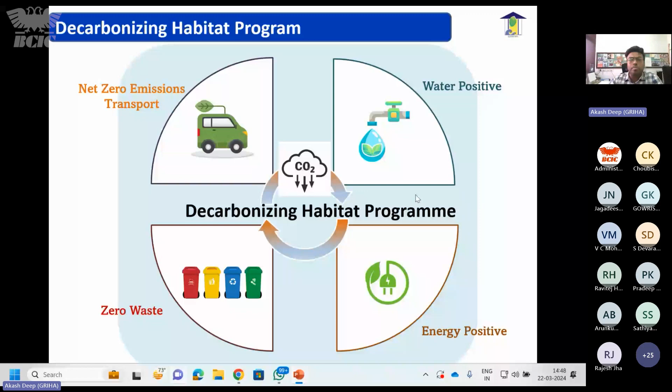This is one of the other certifications at the base level, the bottom of the pyramid, our affordable segment. We do this with banks, and again in this, energy, water, and carbon are the three major areas we look at. On this basis, we help make the bottom of the pyramid much more efficient. It's a both-ways approach—bottoms up and top down.

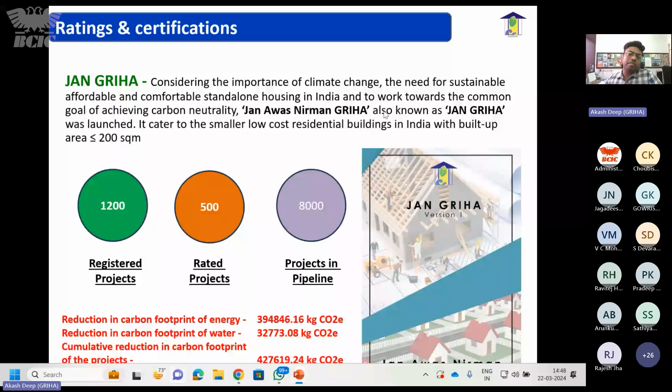Coming to water now: water everywhere and no water to drink. That has been a past saying which is now coming more and more true in recent times, and no better place to illustrate this than Bangalore, because Bangalore has been known as the lake city of our country, and somehow now it is moving towards being the dry city of our country. One of the reasons is that globally, as we all know, we have lots of water that we see—the ocean, the water bodies, the glaciers, lakes, cities across the globe—but only 1% is actually potable and usable, and that's where the challenge lies.

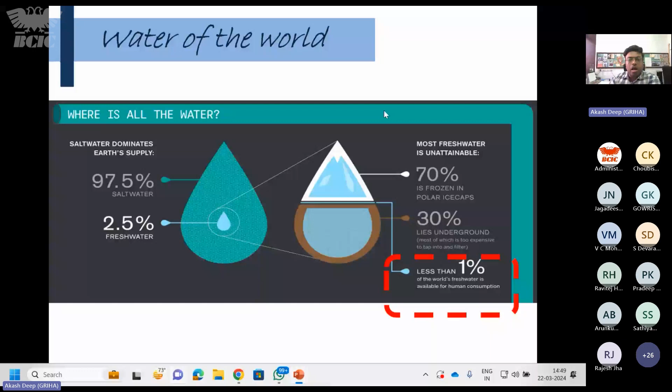The consumption of water has increased drastically because of increase in population, activities, and industrialization, but the production of water is not there. What's happened is that the 1% that was usable has also been contaminated and pushed towards not being usable. This is the reality, and it's become worse now. In 2007, as per the WHO, for every 6 persons, 1 person was not getting water; now for every 6 persons, 3 are not getting potable or clean drinking water.

In India, it's very, very straightforward—we like everything in its harsh realities, so nothing is balanced in general. So we have too little in some countries, states and cities; we have too much at the same places probably, and in some other new locations; and we have too dirty.

The water which we have is becoming too dirty to utilize again. And lastly, everything revolves around too many. So that's our country's biggest challenge. Everything in extremes: too much, too little, too dirty, and too many. I think everything starts from too many, and that's where our current problem starts in terms of water.

But also one of the challenges, as I was mentioning, is that Bangalore is one of the cases where we already know that we are at the stress levels, and not just Bangalore, but India as a whole. As per reports by the government and international bodies, we are pushing towards water scarcity levels. We have already crossed the water stress levels, and that's not just India, that's across the globe. We are already in the water stress levels, and by 2050 we are bound to reach scarcity levels, basically, if nothing is done.

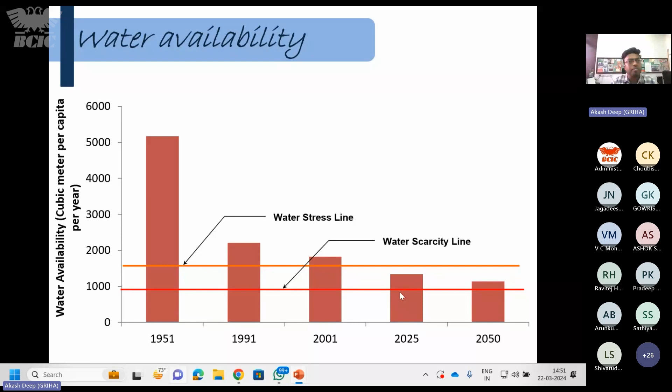But for every challenge, for every problem which we face, there is still a ray of hope for us, especially in India. The location of India on the world map is very crucial in terms of water. We have been blessed with one of the purest forms of water which can be utilized if utilized properly. That's the rains which we have, the monsoon rains, which cater to most of our water consumption across the subcontinent throughout the year, reviving our groundwater systems, reviving our rivers, both perennial, non-monsoon and monsoon rivers.

But again, somehow we end up cutting our own base when we have some solutions with us. This is one of the most, I'll say, unutilized and misutilized resources in our country, a mismanaged resource in our country.

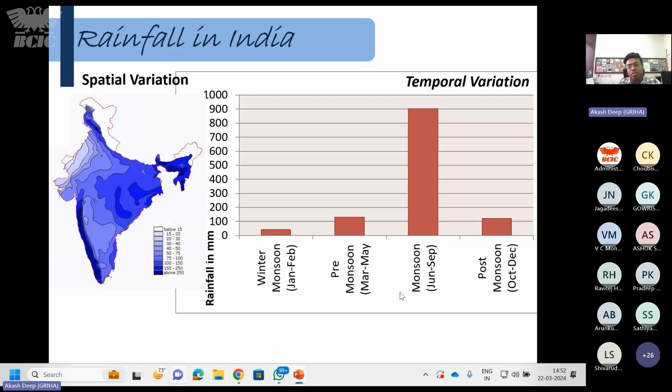And a very good example of this is that India has a very diverse landscape in terms of topography. You have hilly regions like the Himalayas and the Western Ghats. Then you have the plateaus and the Ganges region and all the valleys where you have lots of water and agricultural land. And then you have the coastal belt as well.

But interestingly, we have built such cities even in some parts of desert regions. We have built cities across all topographies which are easily flooded, doesn't matter where you are. For example, last year we had floods in Jammu. Jammu is a hilly region in the midst of a hillscape, basically, where water is already at a scarce level because water does not stay due to the slopes of the region. But we have managed to flood that city in the midst of the hills, basically.

Similarly, Rishikesh is another example. Gurgaon is a very classic example of copy-pasting from the western regions without understanding the urban complexities of that copy-pasting. Floods come first and rains come afterwards, basically, in that region. Even in a small drizzle, the Gurgaon and Delhi region gets flooded because of the ill-designing of the cities which we have done. Misconceptions in terms of water management, rainwater management.

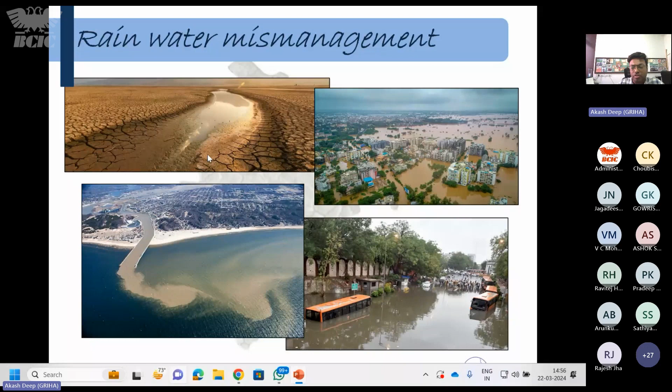Also, most of the water we have is being polluted with various consumption patterns across cities, rural and urban areas. Interestingly, this is the water which is recycled and sent to all our flats, and all our wastes also go into the same water. Whatever type of treatment happens at the city level, that's what you get from this water.

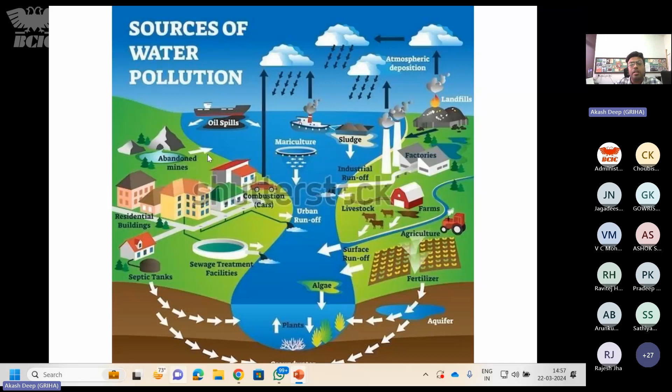As I was mentioning, the water cycle is very important. What you give back to the water is what we'll get back from the water at the end of the day. One of the challenges our cities face nowadays is that potable water, both surface and underground, is being contaminated so drastically that potable water availability has reduced drastically, pushing our cities to stress levels.

But still there is hope. As I said, we can still improve, we can still adapt, and we can learn from our previous culture and behavior patterns. There are three basic areas where we can work. The first one being the design of the system, because design is the key to being sustainable at low cost and no cost.

Once you have built a building, it's very hard to change. Design gives time, gives more time to think through, come up with solutions, come up with local solutions which are best suited for your problem.

Another challenge we face in our current times is that we have ample amount of information—I won't say knowledge—because of global connectivity, networking, the internet and everything. What lacks is choosing the right knowledge out of that information.

That's why designing is very important for any system, any project, any technology, because that is a low cost option. You can try alternatives, do innovations in that phase, and it costs nothing. But once it's built and you move into the operation and maintenance phase, there's only a limited way of becoming sustainable. The best part of this scenario is that 60 to 70% of the built form is yet to be built in our country.

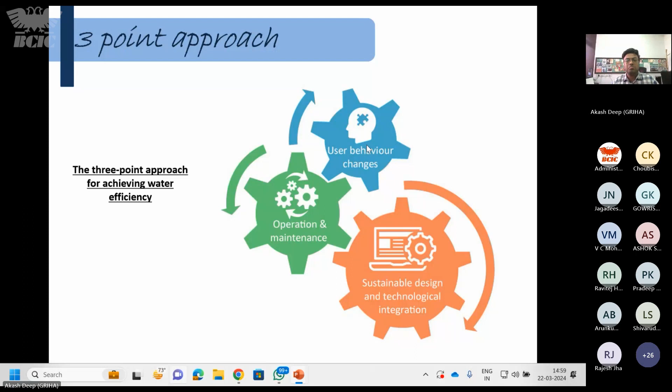We used to have food which was local, as per the climate. We used to have buildings which were local, as per the climate. We used to have clothes which were local, as per the climate. Now we are developed—that's the irony of development.

So in general, as a resource in a built environment, it's important that we reduce our demands first and then look for supply side management. In a building, you use water in landscaping, building water demands, your consumptions, HVAC and construction. So whatever way is possible in design and systems, first we reduce our demands.

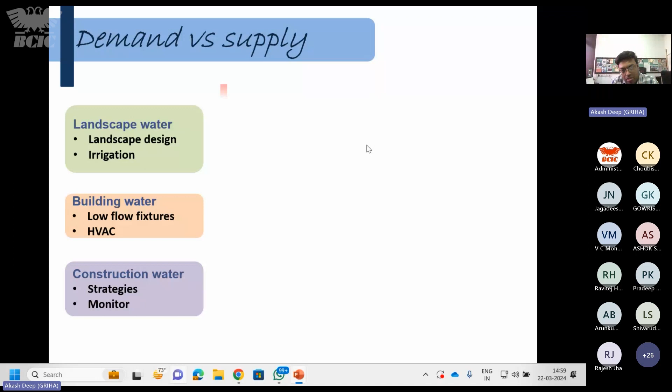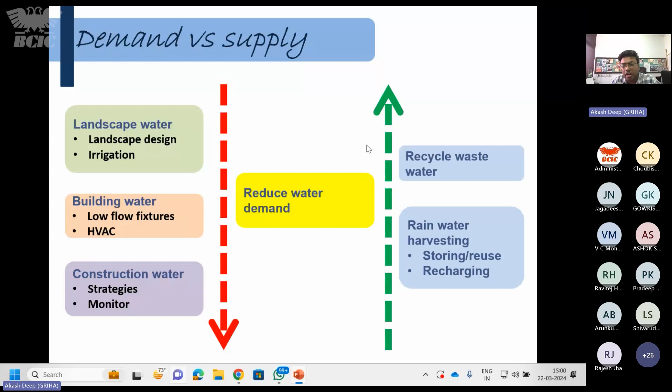Whatever reduced demands we have, then we go into the supply side—how better my supply can be, whether it's recycled wastewater, rainwater storage, or better, recycling and recharging rainwater. So it's demand and supply. If you jump to the supply side directly, automatically it will be unsustainable because you have large demands. Large demands means I need large supplies, and automatically when going for large supplies, sustainable sources will not be possible. So reduce demands step-by-step, then go for supply management.

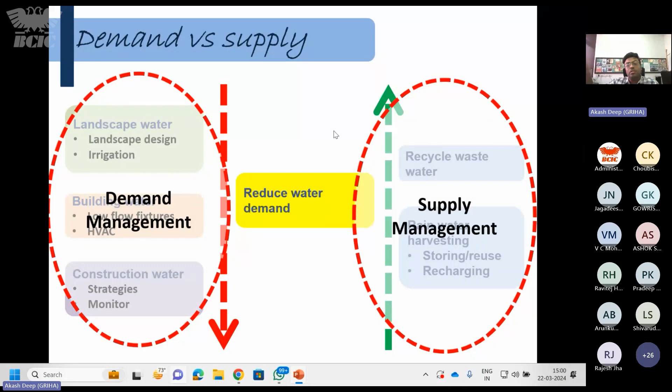If we go into the building demand requirements, it's very straightforward, very simple. One is how to change your user behavior. And these were taught as good habits. I think it's still there in children's books, the preschool books and all.

Close the tap while brushing. Please do not take showers. Use a bucket for bathing. I doubt we still follow those basically.

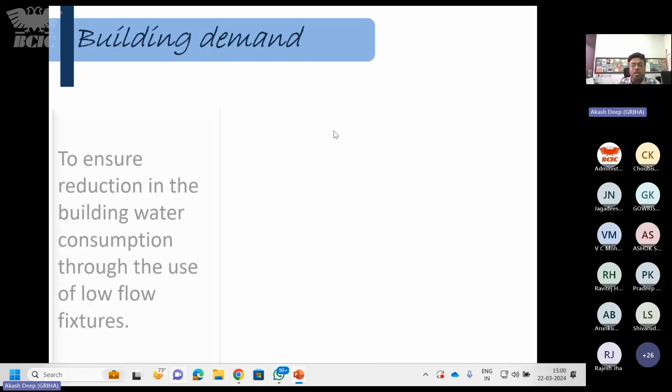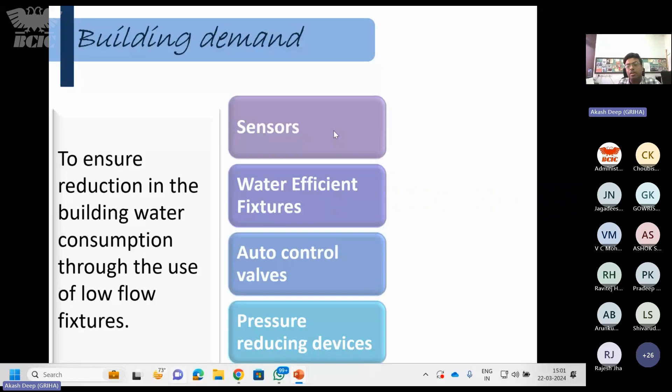But in general, other than habits, what you can change is your systems. Very straightforward, use efficient systems. Nowadays we have this option of low flow fixtures, auto control valves, pressure reducing devices, sensors, which make sure that your water consumption is reduced. But all of this is very good as technology, and with technology comes lots of maintenance. It is important to understand the technology to the fullest before using it.

And there's a very interesting example and story behind the low flow fixtures, which actually happened. So we all know these low flow fixtures work in terms of reducing the water supply, but because of the pressure, you are still able to wash your hands, take a shower, or flush the WC. But these systems work only when there's good pressure, 3.1 bar pressure, or a maintained pressure for these systems to work basically.

Now, in most small scale houses, individual houses, G+1 or G+2 stories, most of us still have a gravity fed system in our homes or buildings, and gravity fed systems have limitations in terms of the increased pressure you can achieve in a 3 or 4 story building basically.

Now, because of our copy-pasting habit and the new building specifications or BOQ which we create—and I'm open if somebody wants to correct me if I'm saying something wrong—what we do is copy pasting. So all taps have to be low flow fixtures, doesn't matter where they are, what they are, and how they are used. Why is this copy pasting a challenge?

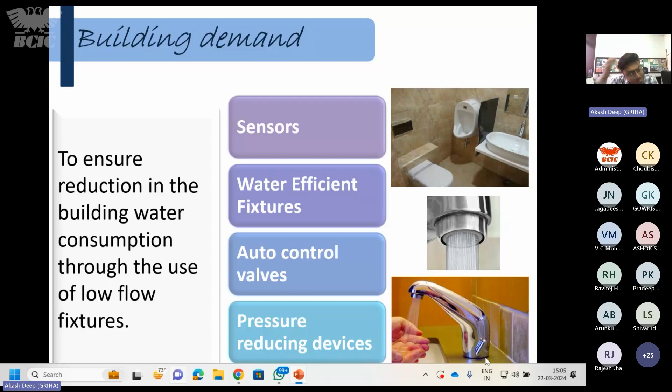Then comes to landscaping, again a very interesting challenge. As I was saying, nowadays we don't have landscaping at all in our cities, and that's one of the biggest challenges which we have. But whatever landscape we have, we have to make sure we minimize the lawn, use native species, and use irrigation systems.

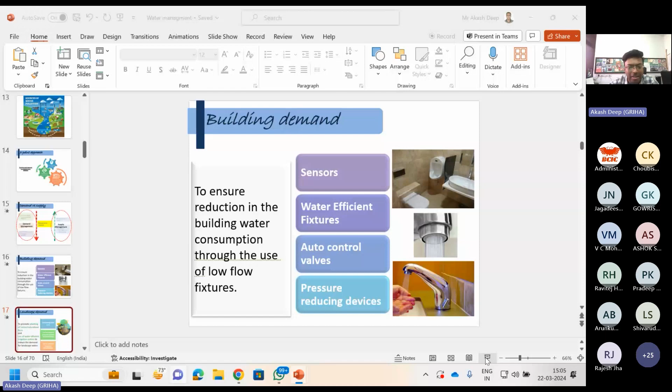Now a very interesting question for you, please use chat again. Anybody know where did the lawn come from? Lawn grass, where did it come from? Yes, the carpet grass - where did it come from? It's not Indian. Indian, UK, US - UK is the answer which I'm looking for.

So the British, when they were here, they had these green carpet lawns in their country. When they were here, they wanted to see that carpet lawn look. And now they have left, but they left their carpets to be watered. We don't have water for drinking, but we are pouring water on their carpets and still maintaining it.

Indian local grass is doob. Doob does not require that much water. It's a very local grass, but we somehow want that carpet grass look in our offices, which is not local to us. It almost takes more than 5 times the water of a normal grass or the Indian native species, but still that's what we want.

Same way, can you tell me which is one of the species of trees which you see very regularly across most of our cities, but it is mostly non-usable, has no use at all. And it is there because of us architects - not because of the client, but because of us. Any species you have seen which has no use but has been seen across our city landscapes? Whichever city you want, whichever site you want, including your own site - one of the maximum trees which you plant in your site, I'll ask you that simple question.

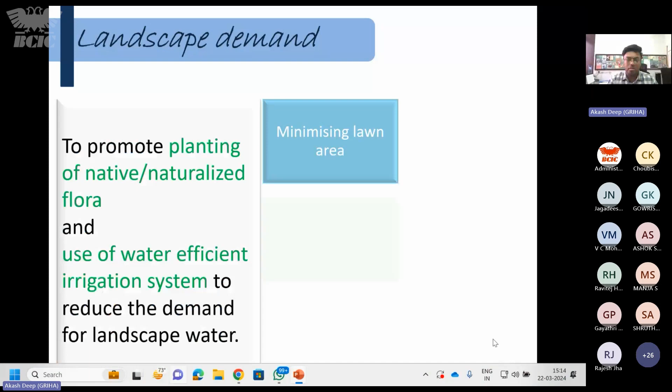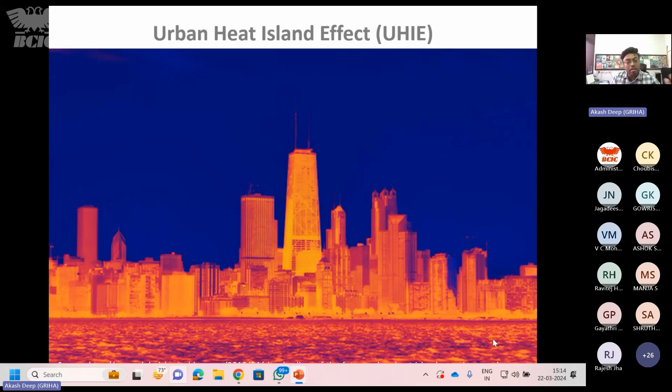And to give you perspective of that problem, here is what it's called, I think you have all felt this, but this is called the urban heat island effect, that our cities have become hotter because of non-availability of trees. And this is not just us pushing this across all cities, this is actually the example.

We are talking about carbon emission reduction, green sustainability, and all, but logically, the oxygen which we use for breathing and living, we all produce carbon dioxide. We have created instruments such as cars and industries to produce carbon dioxide, but the only thing which can produce oxygen is plants. Carbon emissions increase because of population increase, machine increase, carbon increase, but the only thing which can give you oxygen, we are reducing that day by day.

And that's what Sir was emphasizing: let's bring gardens, let's bring parks back to our life. A very interesting example from any of our cities, not just Bangalore - it's the same across even tier 2, tier 3 cities now, because they are aping Western so-called modernization planning, with more spaces for cars, less spaces for trees and people to walk around.

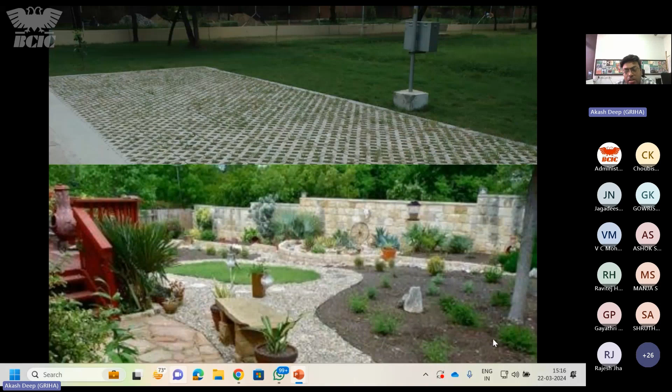So this is the biggest challenge we are facing in city designing and planning nowadays. But still there is possibility if somebody is looking for it. There is landscaping design in which you have not hard pavings but soft pavings, which allow water to go in, allow the space to still be cooler, and still have grass. Parking areas can have covered grass pavers, so that some part of water still goes down. Shading the hard paved areas where possible.

Now, we all are industry specialists and have gone for approvals for our building plans multiple times. If you see the planning nowadays, what you have is 8 to 6 meters of road, then the building footprint of the campus, majorly above a basement, and that 6 meter wide road which you have left is a fire tender access, which is a mandate requirement.

Now interestingly, the lifespan of a building you are creating is basically 60 to 80 years. Can you imagine in that time frame how many times a fire tender will come to your site? I'd say none, or probably once or twice if there's a mishap. And because of that one or two instances, what we are creating is 100% hard paved surface, and the basement is anyway there, so everything is hard paved.

So what some projects have done - I think Indira Paryavaran Bhawan, one of the ministry buildings, a government building, I'm giving you an example of - what they've done is everything is grass pavers around the building, and that 100% fire tender access is green. And they've stopped creating designs where you take a car around the building.

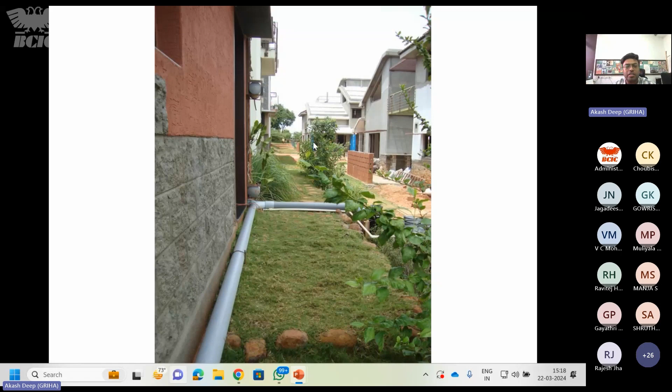A very interesting incident happened on social media involving one of the developers. What happened was there was a video from the US or UK, I presume, in which a road was being painted with high SRI paints to reduce the heat island effect, so that white colors reflect the heat and don't absorb it, reducing heat in the city area.

In that video, you see two patches that were barren, a road, and the painting going on. One of the developers commented that this technology is being brought to campuses in our country - innovative technology coming to India. Then another person commented, this is a good technology, very nice, very good.

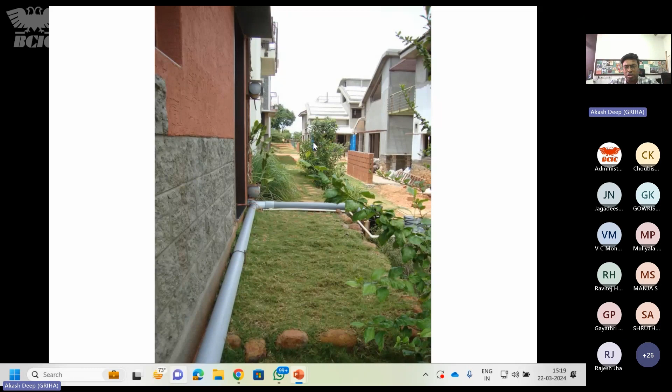You're investing and spending money on it, but there's a free-of-cost technology available to do this work, which is just planting trees along it. It does not require any money, it is easy to manage, and it gives you multiple benefits. Instead of first spending too much money on high technology and then looking for low-cost and no-cost solutions, realize that sustainability is not costly. Sustainability is very local, very basic, it is common sense. Just copy-pasting any systems does not work, basically.

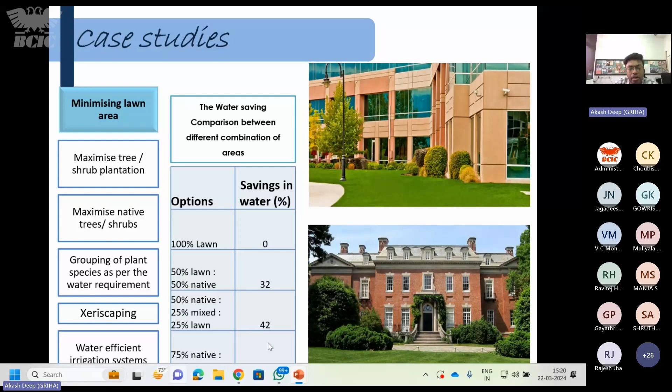Some case studies of landscaping. Instead of having these carpet grasses or lots of lawn, this is what happens: if you have 100% lawn, there's no saving. But the moment you reduce your lawns and increase your shrubs and trees in the same landscaping area, you receive a huge amount of water savings. If you've visited Western countries, you'll see that even in common areas of city landscapes, they do not use grass nowadays. Everything is shrubs, because shrubs are easy to maintain and have more water retention property. Trees and shrubs, that's what they have gone for.

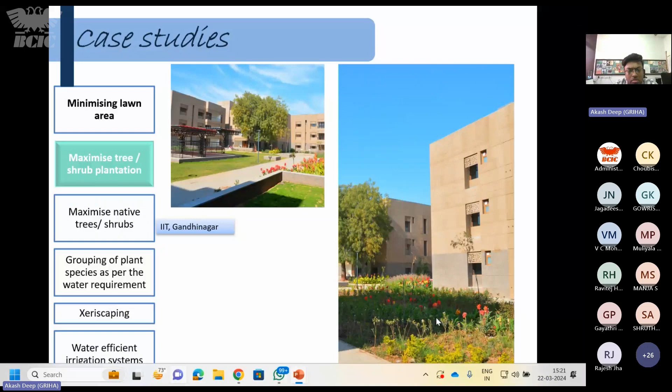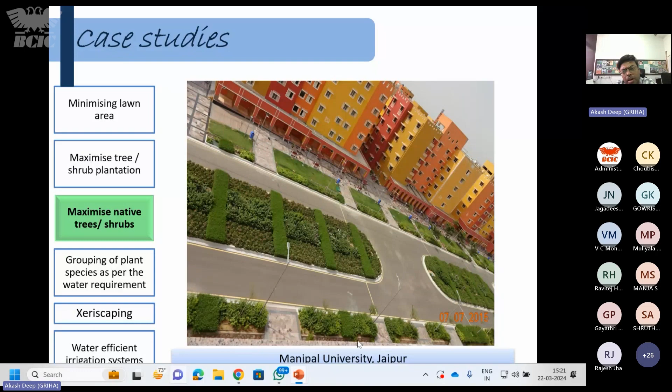Maximizing your shrub area, that's what we were discussing. This is Rajasthan, again Jaipur, Manipal University. What they've done is only minimal patches of grass, mostly it's all shrubs. And now they have started planting trees to shade the hard-paved areas from the sun as well. Grouping of trees is very important. If you put a palm and a peepal tree together, the peepal tree will never grow, because the palm will take all the water which the peepal tree requires. So grouping of trees in landscaping becomes very important, and where you are planting what species becomes very important. That knowledge is essential when doing your landscaping design.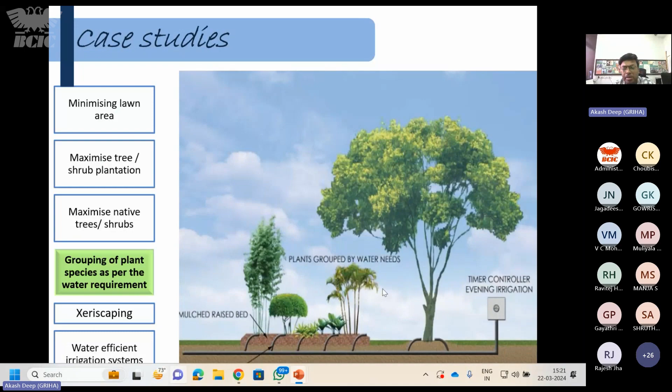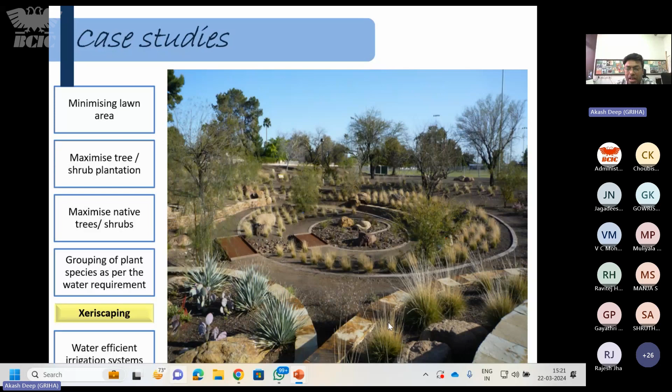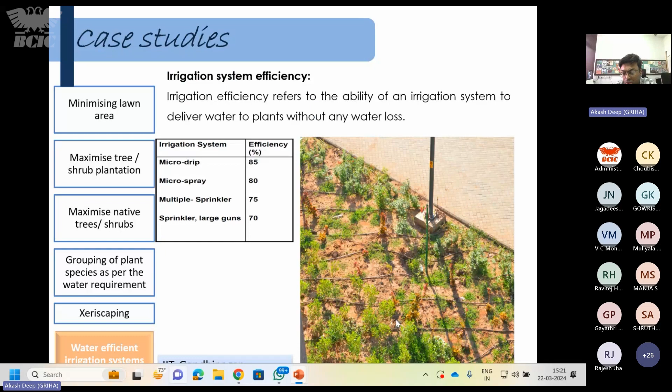Xeriscaping is a very interesting art which has been there in our dry regions, and now most cities are moving towards dry conditions, so they will be required to adopt dry landscaping. But it has its own pros and cons. It can be implemented through irrigation system efficiencies to reduce water demand in landscaping, because landscaping is one of the huge water demands in our countries. Drip irrigation is one of these. Even in individual flats, if you have a terrace garden or balcony garden with lots of pots, you just put a 2-liter Coca-Cola bottle, cut it, put holes, put water in it. It will automatically water the plants for the next 2 or 3 days, so you don't have to go and water again and again.

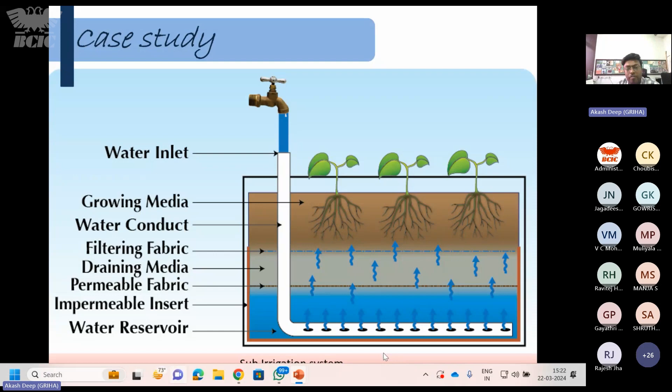This is from one of the water audits and certifications we did at a site. What we found was that the water coming in and reaching the STP had a gap of around 40%. Somehow it was just going somewhere. Interestingly, when the whole audit and certification process happened, we realized that 40% of the water was actually being utilized for pots, because the owner or company had a strong interest in plantation and had lots of plants in pots. That is one area which is not measured or monitored, and that's where the water was being lost and not accounted for.

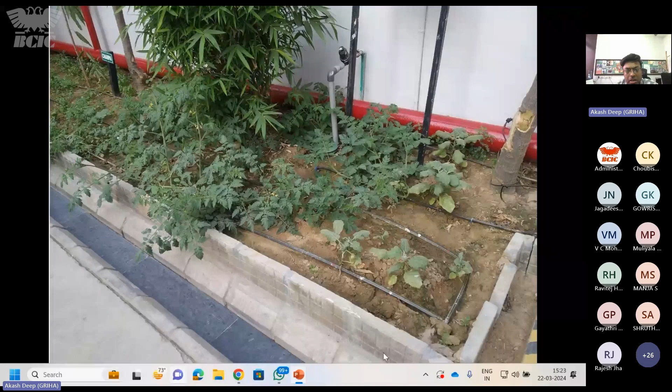So, various ways of reducing water consumption in landscaping: on the roof, mainly shrubs or native trees. And interestingly, what we have always been taught is that water has healing properties, not just in terms of consumption, but in terms of its sound when it's flowing.

Its visualization when the water is flowing matters too. Many times, if you search on Google, YouTube, or music apps, what you'll find is that relaxing music is actually the sound of nature. That's what it is at the end of the day. And in that nature, one of the key elements is water.

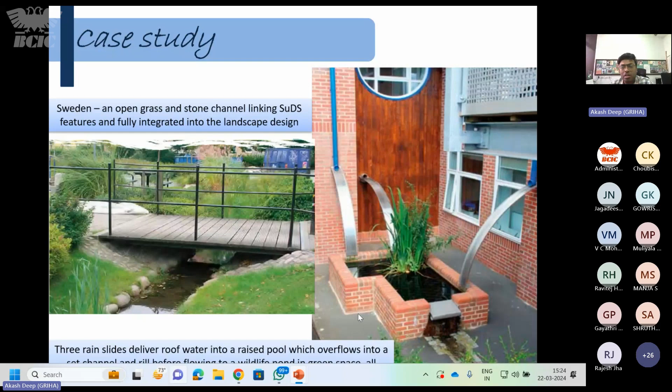Now interestingly, in all our designs, we make it important that water flow is visible to the eyes. In typical design, what we do is take a PVC pipe and take all the water out of sight, out of problem, out of mind. But that doesn't happen that way, basically - it creates a much bigger problem. So open drains, obviously, require maintenance, but that's what gives the soothing effect of water. You listen to the water flowing - even the rains, the lake water bodies which you used to have in Bangalore - those had not just a climate effect, but also a healing effect on our minds.

Each of these small water bodies helps the local microclimate and ensures significant groundwater recharge, because nowadays that's difficult given the planning we follow: basement, road, end of site, basement, road, end of site - that's the consecutive planning pattern in our cities.

So majorly doing rainwater harvesting at the individual levels, through this planning and process.

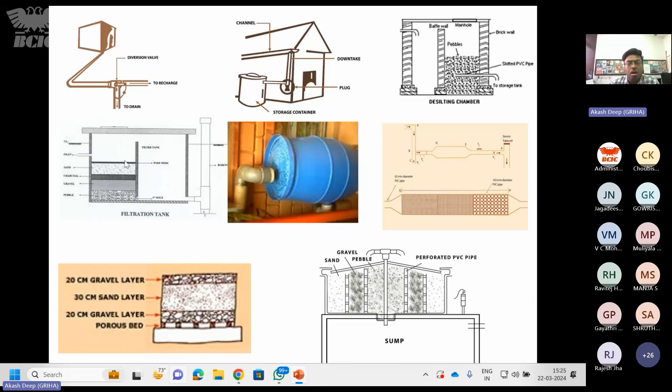A very interesting example from Hareda, Panchkula. Just give me a second. Sorry, water - can't live without it.

So a very interesting example from Panchkula, Haryana. It has an interesting architectural design as well. But especially why I'm picking this example today is that we are majorly dependent on air conditioning systems in our country.

This has been running for the last 10 years in the Panchkula region, which has a hot and dry climate. So again, do not copy-paste this design - it will not work in your region if it's Bangalore, because both climates are very different. It's a well-suited design for hot and dry climate.

If you've interacted with North Indians, there used to be - though nowadays it's rarely used in most buildings - these desert coolers: basically a big fan with jali on three sides, and water is sprinkled on that jali. The air that comes in is cooled because of the water on the side jali. So this building has been created as a big desert cooler.

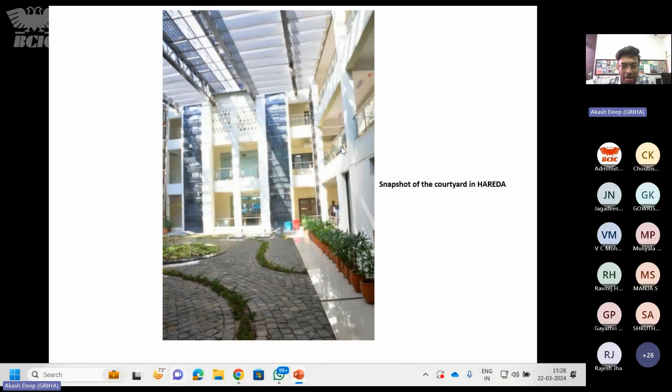Then they've created a courtyard in the center of the building, where they use something called misting technology - water is sprinkled inside this courtyard. If it's too hot during the day, it's done twice - morning and evening before office begins, and in the afternoon after lunch hours.

But if it's just a little humid, it's done only once a day, and in rainy season it's not run at all. This creates positive pressure and cold air inside the courtyard. Logically, as per physics, air should blow from positive to negative pressure areas, but we have corridor walls in our design that block this.

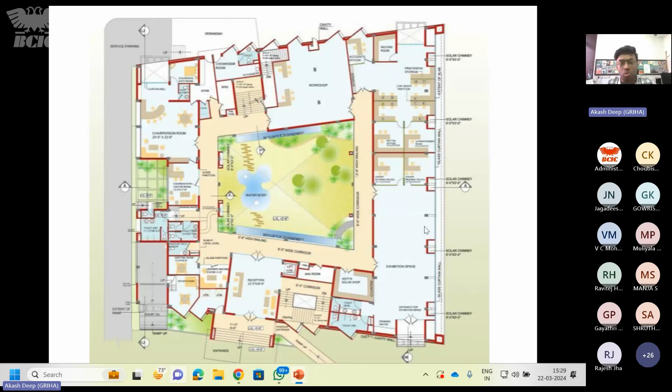What they've done is put designer jali at the bottom of these corridor walls. So in the section of the room, there's designer jali at the bottom and vents at the top, creating an automatic draft in the room - that's how the building is cooled, with no air conditioning at all in this space.

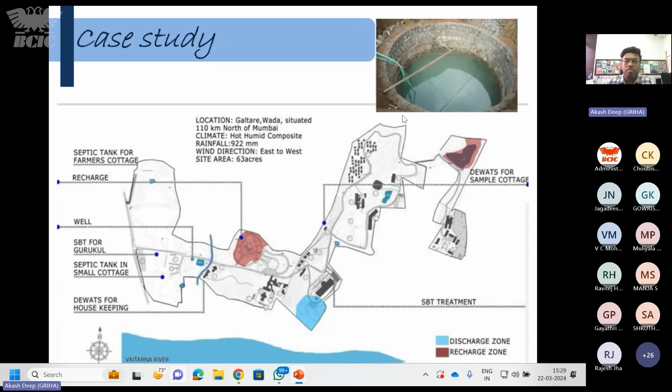A very interesting example from Maharashtra: Govardhan Eco Village. They have developed a green campus, an ISKCON campus. Do go and visit with your family.

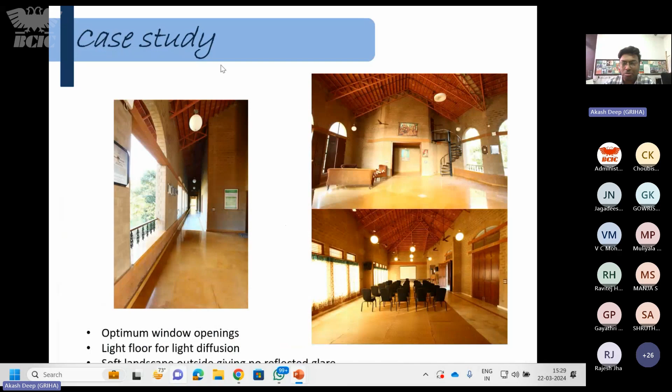It has mud blocks, stabilized blocks. There's no AC, just a fan. And in summers also you'll require a blanket. I'm sure of it, and we required it.

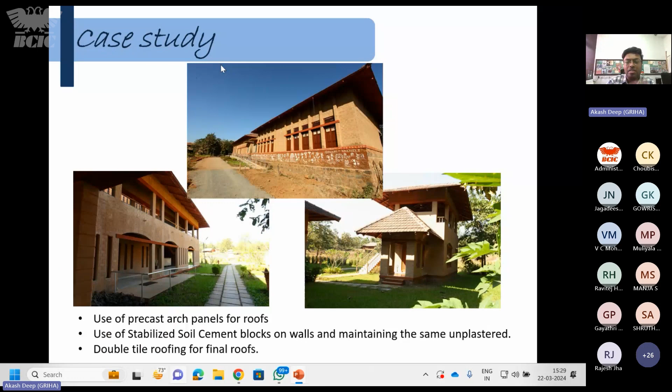Everything is on the site, from the site, for the site. Food is grown over there and is what is used for eating. All the waste generated is used to create biogas and manure. It's on the outskirts of Mumbai. Do go and visit if you want to understand what sustainable lifestyle living is basically.

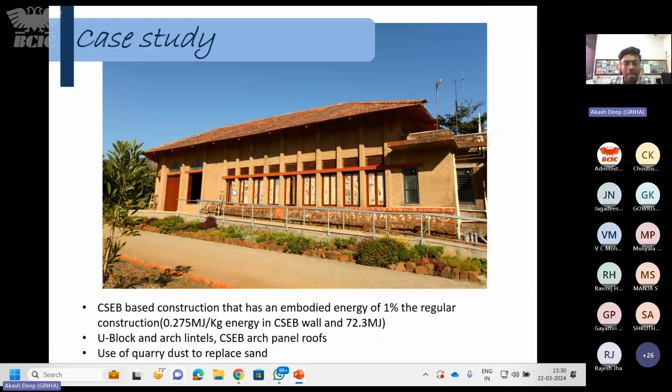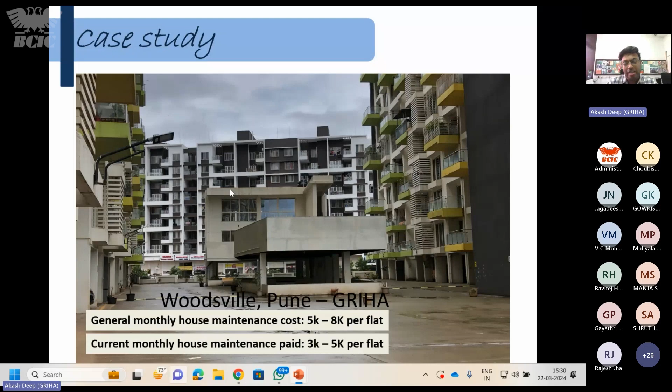From modern day times, a case study from Pune again. This society generally has a maintenance cost of 5 to 8K per flat per month, and currently they have reduced the cost to 3 to 5K, with a target of 2030 to reduce it to zero.

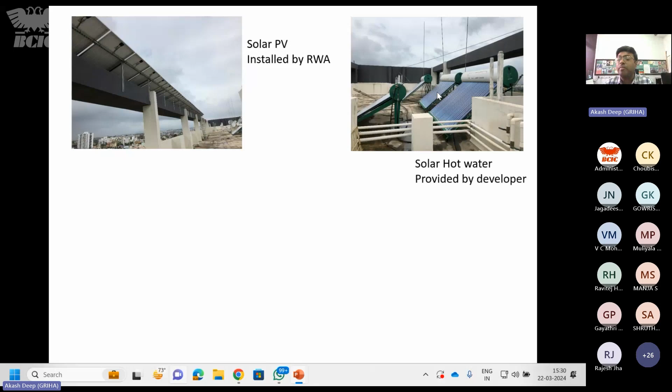How are they doing it? They installed the solar PV themselves. Solar hot water was given by developers. There's also a very interesting data management system.

I'm not seeing this even in corporate offices. They have individual flat energy and water consumption patterns, and they display it in the reception lobbies, highlighting with red and green who is using excess water and energy and who is using less.

This is the first site which I've seen in which rainwater harvesting has come forth and actually stored runoff and reused it on their site from their own design perspective.

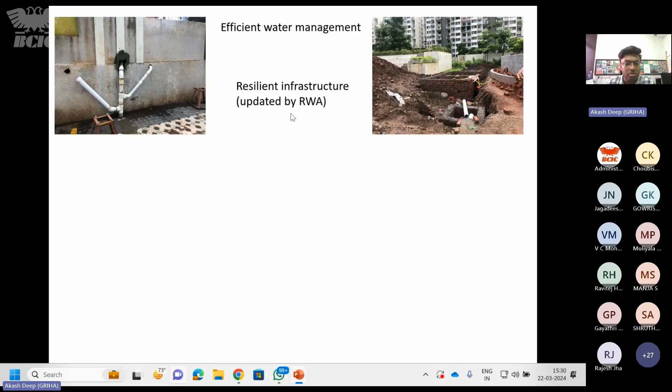They are reusing RO water, changing aerators, and this is one of the sites in which water flat meters were installed by most of the flat owners. So, PPT presentation.

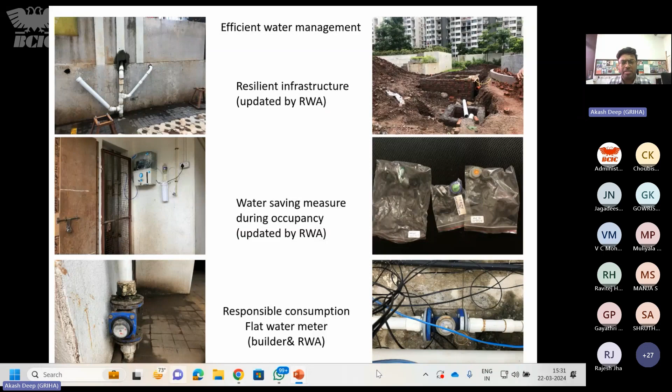Very interesting example. And now coming to the close of the presentation, last but not the least, a bit about net positive certification.

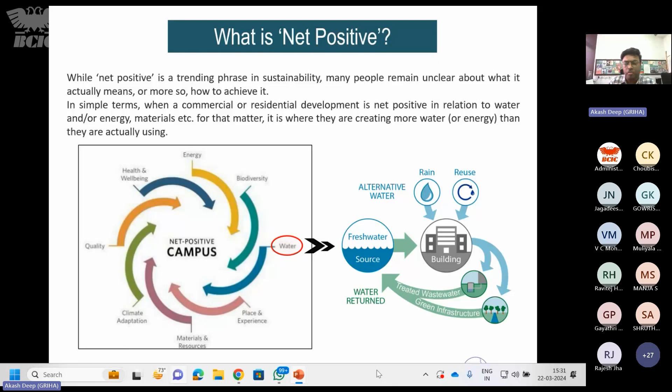So net positive generally means we give more back to nature than what we are consuming, and that's what the basic water cycle is.

Now, interestingly, in water positivity across India, rainwater systems are one area where people claim that they are net water positive. They have given back more than what they are using.

But in GRIHA, every number which you claim has to be measured and monitored. That's why if you're claiming that you are recharging so much water, it has to be metered and monitored. If you are using some water, you have to meter and monitor it, because that's what net positive says.

Numbers need to be validated. Without validation, it has no value at all.

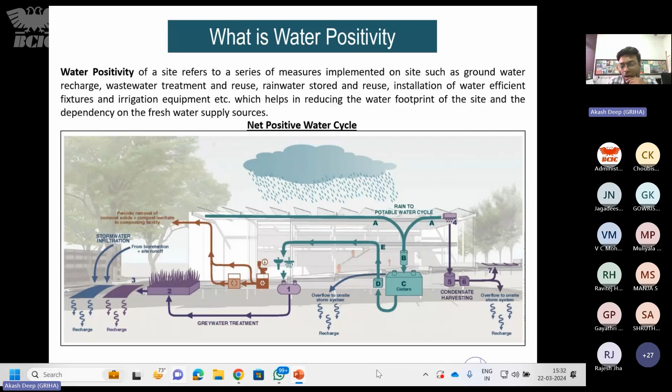Interestingly, there are multiple projects which have gone ahead, and one of the companies we are working closely with is ABB, DS Groups, and hotel industries all across the country, with which we are helping them. The TERI team audits them, then we certify and make sure that they are net positive in terms of water through strategy.

So what it has is two parts, quantitative and qualitative. Quantitative is demand versus supply, direct numbers. Qualitative is how better water systems can be improved.

Water quality, water metering, smart mini grids, O&M protocols, because interestingly, water systems do not have O&M protocols. If you have them and proper policies are in place, it's very good. It can be further upgraded basically.

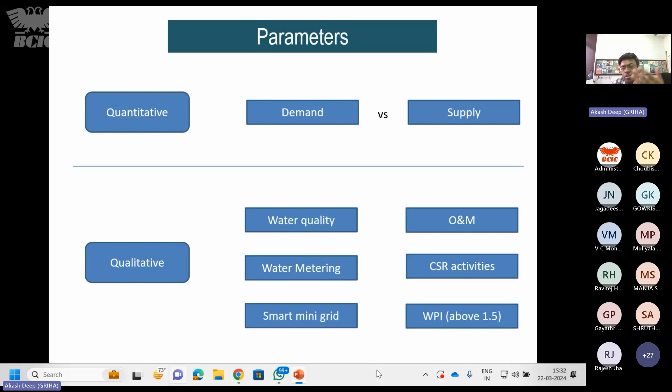CSR activities and water positive index above 1.5. So generally, the audit process is: you register, you audit, and report with recommendations.

Recommendations are to be implemented, or option 2, they are already implemented. If implemented, you proceed for certification. There's a scale on which you are certified.

So from 0.3 to 0.94 is towards water neutral. Then water neutral is 0.95 to 1. Net water positive is 1 to 1.5, and above 1.5 is super water positive, in which you are giving much more than what you are using basically.

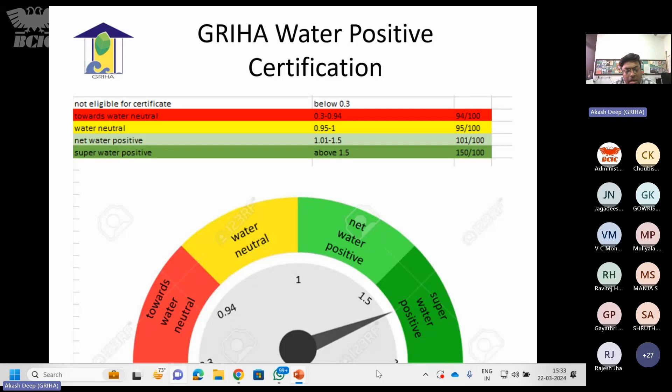The process is very simple: demand reduction, supply management, rainwater management, and recycle and reuse.

Some of the projects which we are doing: two of the Bangalore projects we have done are both from ABB, which is ABB Nelamangala and ABB Pune, both are water positive. And one example from Pune only, I will give it.

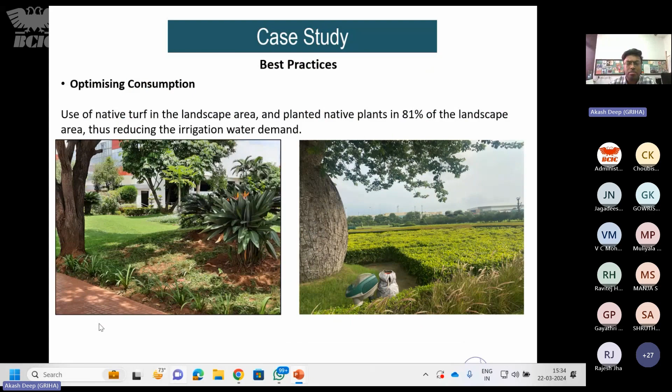So they had this interesting old water body within the campus, and one of the redesigning factors was that this was being converted into a modern rainwater harvesting system. Interestingly, the audit report said, don't do that. It's a very good system, preserve it, it's an old system. And we did that. So they have hotels, offices, lots of shrubs, lots of trees, metering, sewage treatment plants, rainwater bodies. So natural bodies help make sure that the water is recharged properly. And on that note, I'll close.

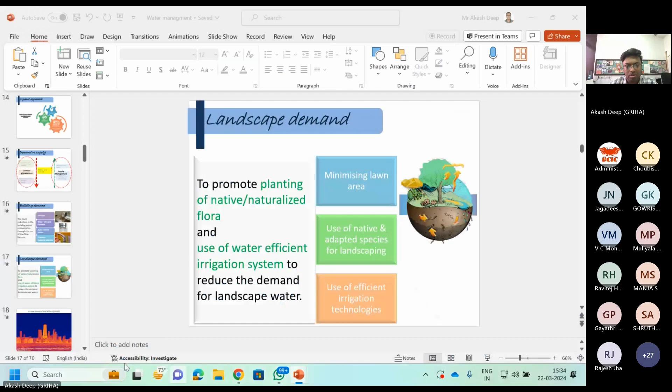I think I overshot. I don't know.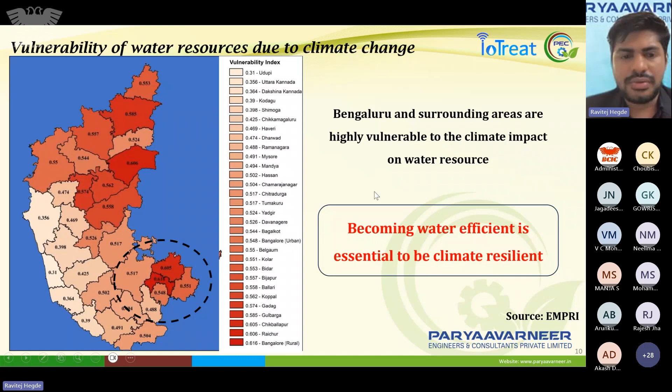Becoming water efficient is not only essential because of sustainability or greenwashing initiatives, but because it is a risk that the industry is facing, and it is essential to address it to ensure the sustainability of the business today, especially in Bangalore and the surrounding areas from where most of the attendees are attending. With this context, I would like to get into the strategies that industries are getting into, or can get into, to address the issue of climate resiliency in terms of water management.

Before I get into the discussion, I would like to clarify the aspect of what is climate resilience. It is the action that we need to take in order to cope up with the changes that climate change is going to bring up. Climate change is inevitable in a business-as-usual scenario, and if that happens, industries have to figure out how to cope with water management, or how to cope with business even when climate change is a reality or is going to happen.

Considering that, there are four major strategies that industries need to adopt. First, we have to reduce the dependency on fresh water, because the water availability, as we discussed in the previous slide about the scarcity of water, is an issue that Bangalore and its surrounding areas are facing today. So reducing fresh water dependency is a necessity. Second, we have to reduce the emissions that occur in the operation of these treatment plants.

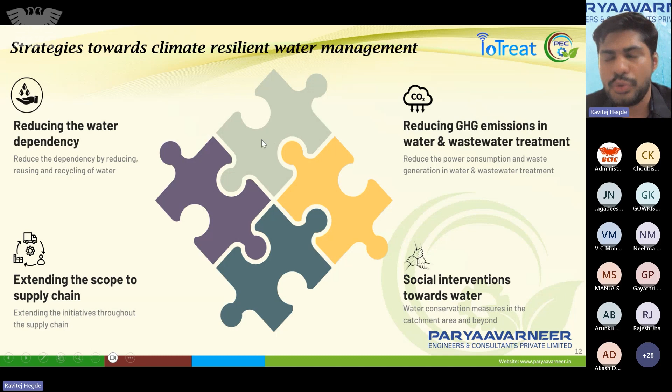Let us address one by one what exactly industries can do to address each of these strategies. The first is reducing water dependency. This is a cliché word - everybody has heard about reduce, reuse, recycle. These are words used very vaguely everywhere, and everybody knows them. However, how we have to implement that in an industrial context is something I wanted to discuss today.

Reduce is the strategy by which we reduce freshwater consumption, or water consumption, at the usage points. There are two major strategies that industries can adopt: one is administrative measures, and the second is technical measures.

When it comes to administrative measures, water management requires robust daily management, because it is a cross-functional activity. Every industry works in a cross-functional manner, and many functions contribute to water consumption. So it requires a lot of hierarchical monitoring and measurement of water consumption and discharge at various points, to ensure consumption is actually reduced. Administrative control doesn't only mean daily management, but also requires regular audits by cross-functional teams, if possible.

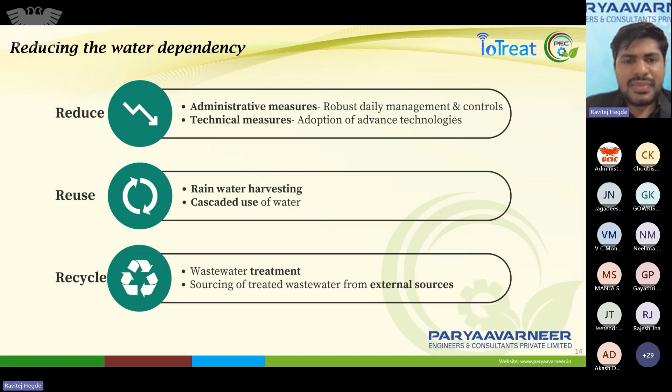As I was mentioning, even though we have all the infrastructure available at the locations, it requires a lot of close monitoring and audits at regular intervals. It is a legal requirement at current date because of the CGWA or KGWA to have water audits, and it's also because various voluntary recognitions ask whether organizations conduct audits on water consumption or water use.

So the water audit is not only about going and checking for leakages at various places or checking only the points where water is getting leaked. A holistic water audit should cover three aspects. The first is assessment of water use efficiency - an initial mapping of where exactly the water is getting used and what is the technically best water quantity that should be consumed at those points.

The second aspect is the water efficiency management system. It's not only about establishing a system or infrastructure and leaving it to the operators to run the entire activities. It requires, just like in ISO 14001 which also incorporates water management, an effective water management system which should run through a PDCA cycle across every 365 days in a year.

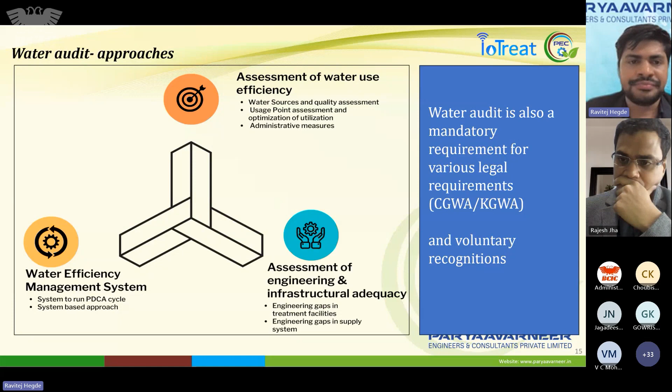We understand most of the things I am talking about now are very generic for most industries, and many industries understand all these points. There are various challenges that everybody knows - in spite of having all the infrastructure, in spite of having the best management system, there are still various challenges that industries are facing.

The first and foremost is lack of application points for the treated wastewater. We come across a lot of industries which produce, say, 100 KL of treated wastewater every day, but they don't have any application points where they can utilize that treated sewage or effluent back into the process, because they have hardly 30 KL of requirement for flushing or horticulture. The rest of the treated wastewater, which is of properly good quality, cannot be utilized because there are no usage points at all in these cases.

So we suggest going ahead with updating the facilities to give very good quality, so that the quality of the water meets the raw water quality. There are options available nowadays - a lot of avenues to sell the treated wastewater so that it can be utilized.

There are challenges with respect to inadequate treated wastewater quality. This can be addressed majorly by addressing infrastructural gaps, if any. The first and foremost thing is to improvise operations and automate the entire treatment plant to ensure the quality is adequate for reuse applications. There are various cases where the treated water quality is good at some point of time and not good at other times.

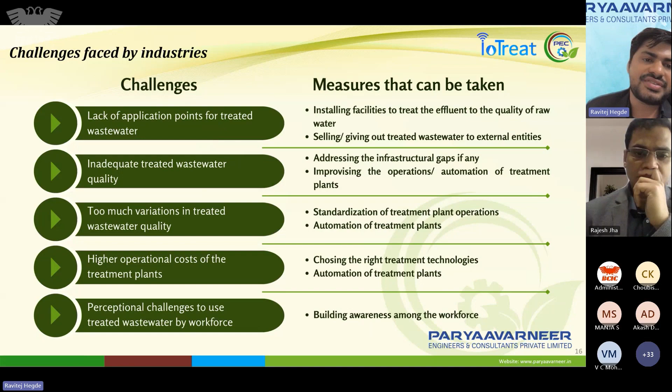So I'll move on to the second aspect, since I need to rush a bit in terms of time. This is about reducing emissions from the operation of treatment plants. We might think that wastewater treatment plants do not contribute much to CO2 emissions when it comes to the entire organization.

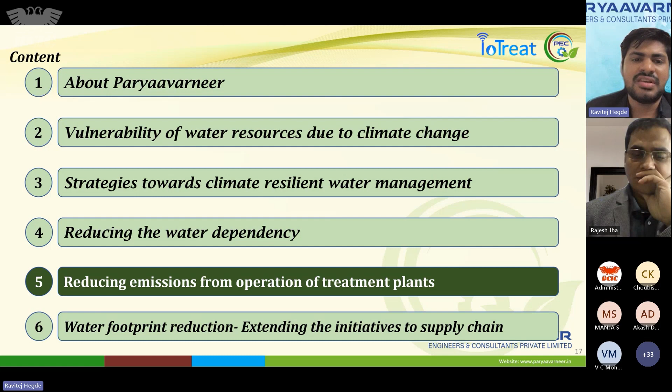But literature and our experience indicate that power consumption is responsible for 68% of the overall CO2 emissions in a typical sewage treatment plant. If you consider a 100 KLD sewage treatment plant, it will emit up to 60 tons of carbon dioxide annually, and each STP consumes between 1 to 2.5 kilowatt hours of electricity per cubic meter of wastewater treated.

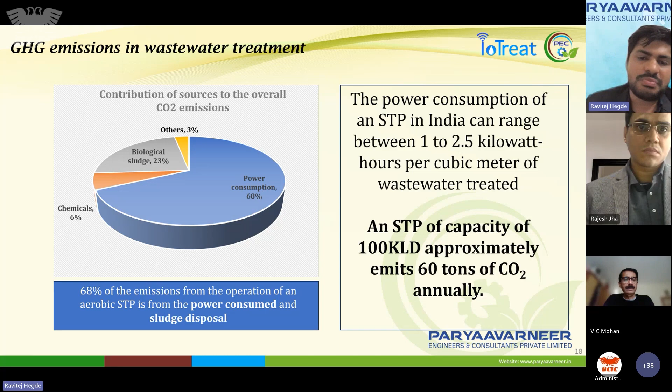This indicates it is very essential to address GHG emissions even from wastewater treatment operations, which is majorly contributed by power consumption.

If we drill down further in aerobic treatment plant systems, it is the air blowers which contribute 70% of overall electricity consumption, because air blowers usually have higher kilowatt rating motors and run around the clock in an aerobic system.

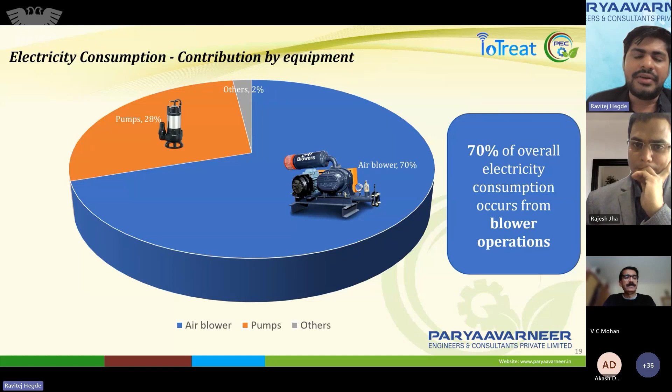So it is essential to optimize blower operations in a treatment plant to reduce overall CO2 emissions from plant operations, which can be effectively done using variable frequency drives, because we don't require the same amount of air to be supplied in the aerobic system all the time.

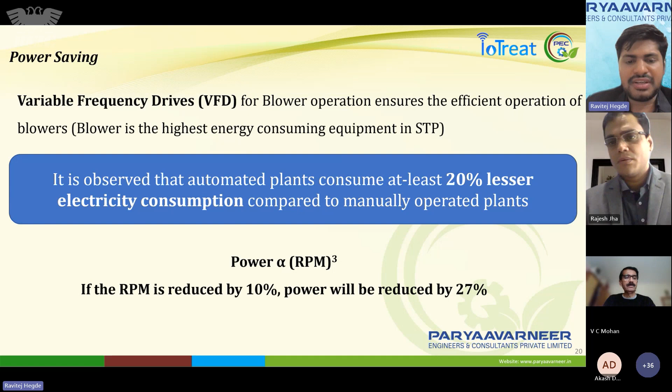There are various options available to reduce overall electricity consumption in STP or ETP operations by at least 20%. It's very interesting that if you reduce the RPM of the motor even by 10%, power consumption is reduced by 27%, so it's very effective in terms of power consumption reduction when you utilize variable frequency drives.

The last point I'd like to cover is footprint reduction. As I was discussing, it is not sufficient to reduce overall water consumption within the boundaries. It is essential, especially for companies that run through larger supply chains or larger supplier bases, to extend these activities across the entire supply chain to have a larger impact.

This can be done with a 4-pillar strategy of capacity building, where specific guidelines and project repositories can be developed and communicated to supply chain companies, especially to MSME companies who don't have as many resources as larger organizations.

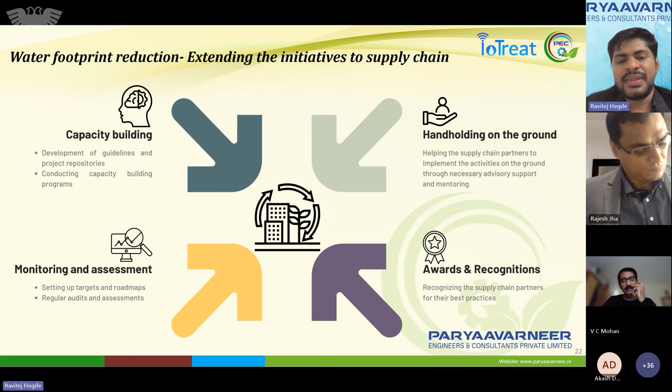Conducting capacity building programs for the suppliers can be taken up, with handholding on the ground. Organizations can help their supply chain partners implement activities that industries are doing in their own premises, help in monitoring and assessment, setting targets and roadmaps, conduct regular audits, and provide awards to recognize supply chain partners in reducing their overall water footprint.

So that's it. I think this covers the overall strategies that industries can adopt in terms of addressing their water footprint and the risk of water shortage. This isn't a risk that's going to come, it has already come. It is already at the door of our industries.

This is not something I'm telling you as a consultant or an industry service provider, but as a responsible citizen of Bangalore, which is facing unprecedented water shortage and will face a lot of challenges in the months to come. It is our moral responsibility to take up certain activities and help organizations in the supply chain who are not so resourceful in addressing these issues.